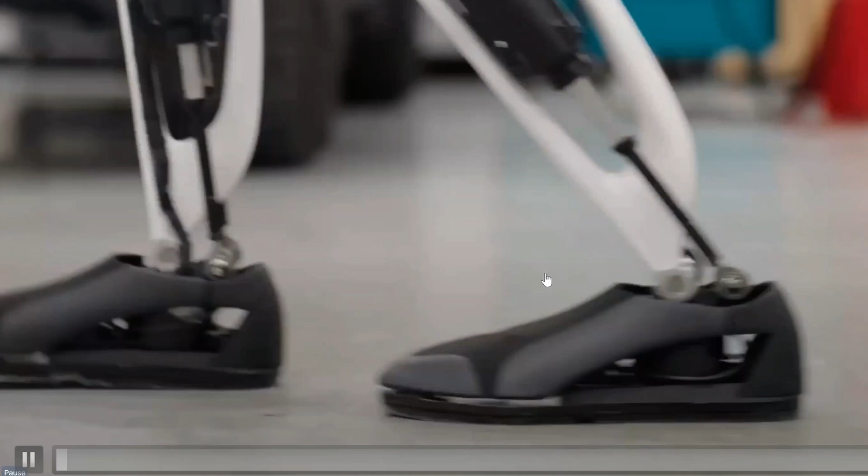Everyone kind of caught this image where they could see the toe box pointing up like that. And that caused a stir out there on the internet, everyone speculating whether A, this was new, and B, it must be actuated, because the only way that thing could be going up is it had to be actuated.

Okay, I'm here to tell you it's not. It's not actuated. I put a post out there just saying there's been a big flap over a flap. It's articulated, okay, not actuated. Full stop. Why? It just comes down to physics. It's simple as that.

We'll go through it, we'll explain why that is, and for many, many reasons. And at the very end, I think we will actually have the final nail in the coffin.

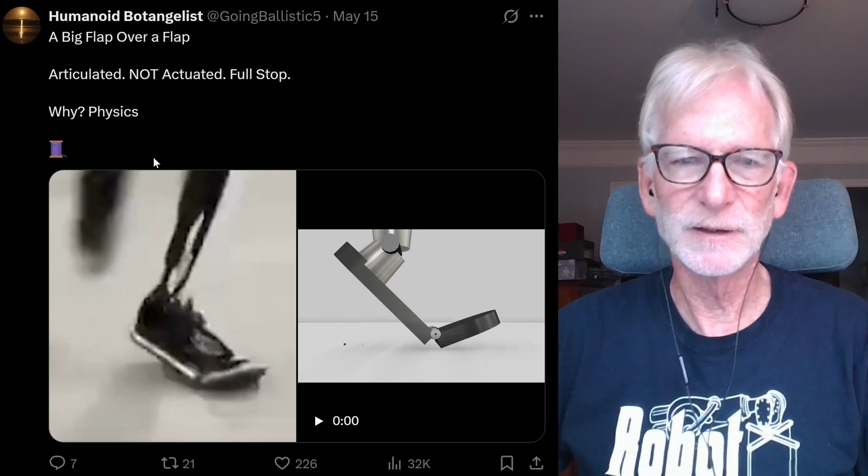This is part of a post I put out that for some reason is going crazy right now. It's got like over 30,000 views, just reminding everyone that in December 2023, when the Gen 2 bot was revealed, this is one of the images right from there where they say articulated toe sections. They didn't say actuated, they said articulated.

Articulated means it's able to move. It's got a hinge in there of some sort, and it has something to put it back in place, probably a torsion spring or something like that, some sort of flexible unit that'll do it. And you can see right here the angle that the toe box makes back there, which is why they put that in there at that point.

We were already seeing that Optimus could walk that way. There was a lot of skepticism on whether they should use RL for walking. And then others were doing it in Unitree, and those were demonstrating, hey, this works. And then everyone said, okay, maybe we should start to pivot in that direction. So it looks like because the modeling was so challenging, it took a while before they got to the RL.

I want to understand the part of the actuator modeling they made in-house. What was the challenge? Did you have maybe, like, you mentioned a couple of things.

Oh yeah, well okay, the first thing, like, these Heim joints are sloppy. Just modeling that right, that when you apply the force down here and going through there, what's the articulation going to be like? Saying exactly what that's supposed to be. So you have to model everything here correctly in the geometry. So it's partly a trigonometric issue. And then when you go up to the knee, it's even more complicated.

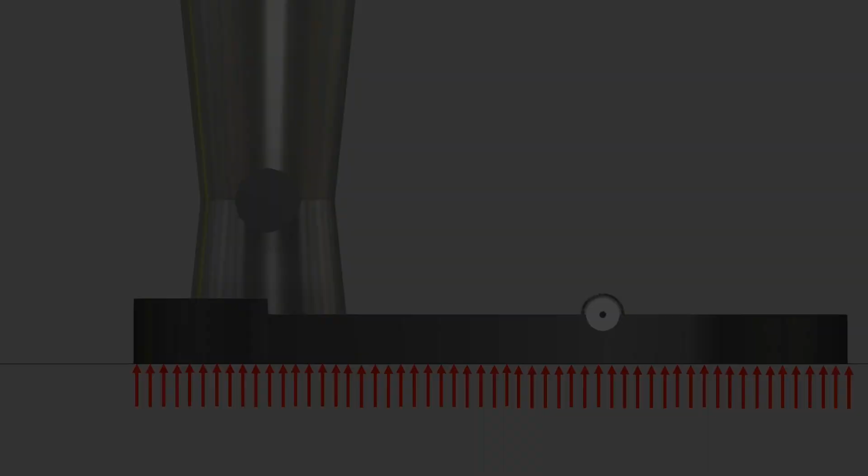What are the reasons that you want to have an articulated joint? So Gen 1 of not only Optimus, but many of the other bots out there, they just had a flat foot, no articulation at all, just because they were getting it out. Everyone was pointing out, oh, why don't you have something that's flexible and this and that, or putting on different shoes. And as you can see, I have a flat foot on a flat surface, and the force is evenly distributed over the entire surface area of the foot.

Now, as soon as I start to change the angle, like lift up my heel just a little bit, so I have a non-zero angle, the smallest angle, no matter what it is, will instantaneously result in this. At that instant, you go from full contact to contact along an edge or a point, but edge and a point is the same thing. One's zero dimension, the other one's one dimension. They have no area. So that means all your forces being right there, you're going to slip.

You're just going to slide right away. So you don't want to have a point of contact. You want to have a surface of contact going on there. And so the reason for having the articulation is now when you do that, look, you've got all this, which means you're not going to slip.

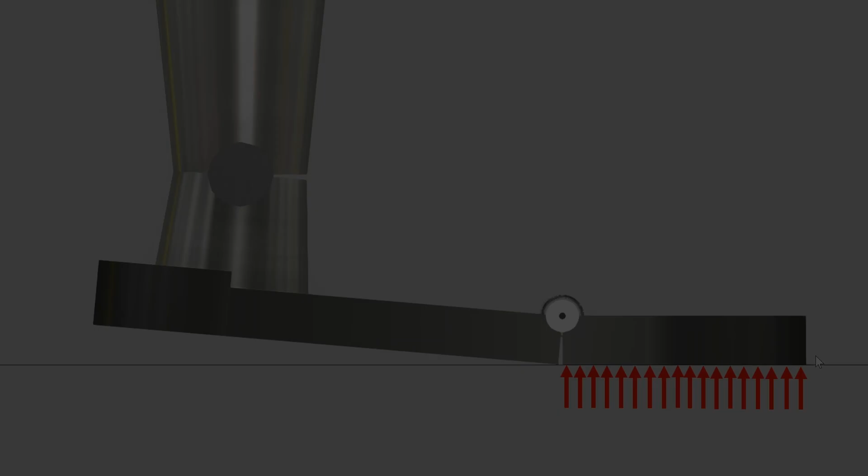From this, I'll go to here to this diagram. Engineers love these diagrams. So here's my foot opened up, and my foot is moving in the backwards direction along this vector V. And because it's sliding backwards, it's now going to create a force F right at that point, or actually right along that edge that we can see there. And as you can see, the hinge joint is not right down at the surface.

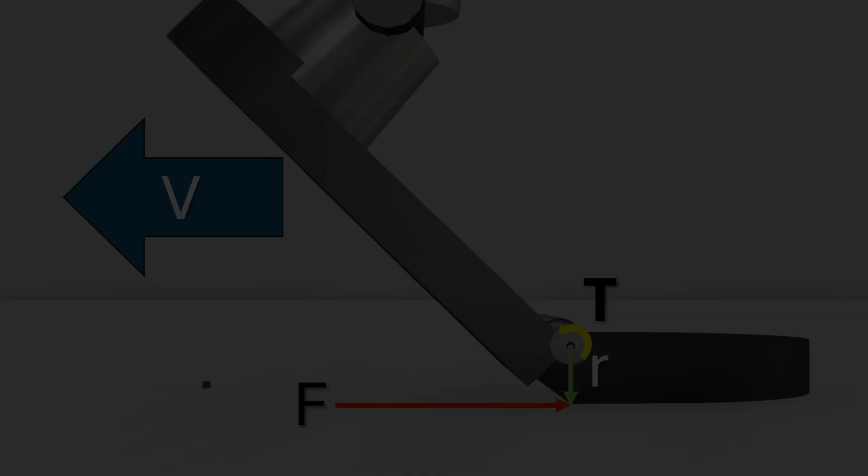It's up a little bit. So there's this lever arm R from here to there. And it turns out to be a lot higher than I actually thought. I thought it was like a centimeter, but now looking at it, it's like, man, it might be like 2 centimeters or more right there. So now it's very clear why it wasn't clear that they were doing it.

So I suspect that they didn't get the RL working until about a month ago.

Okay, so hello, Mara. How are you doing? Good, good. Yeah, if anyone just saw a previous episode, which was basically our own review of a previous walkabout or field trip at the Automate show, you're going to notice I'm still in the same studio, still wearing the same Robot Mafia t-shirt.

So it's clearly still the same day, but this is a second episode we decided to tape, which is going to be about the Tesla bot and the dancing videos that came out the past couple of weeks. Obviously there's been a lot of interest and people asking what's our take.

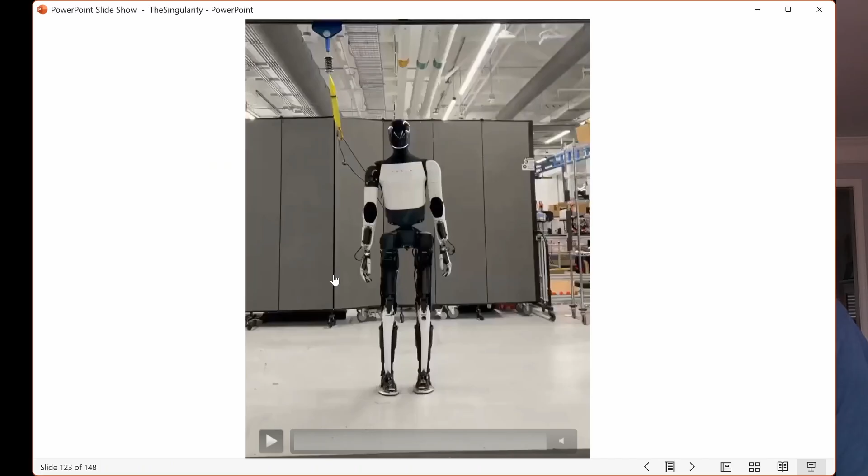So then this came out, just the week past or so, and this is the dancing robot, which everyone has noticed dances better than the human did in the Optimus suit going back three to four years ago. I think it's almost four years ago now.

And so this was a very short video clip. A lot of people get very excited about it, and we'll talk about the excitement in a few minutes here. But there were some reviews. So what were the reviews?

Well, let's go to the team itself to see what they thought. Milan says more coming shortly. The team has been working very hard in the background, entirely trained in simulation with RL. Now, again, he's pointing out RL. He didn't say that back in December.

Many optimizations and fixes have been put in place in our sim-to-real training code. The cable is there in case of a fall, not actually holding the bot, since this is an early result, which we will get more stable very quickly. Okay, so let's keep that in mind.

Then Julian Ibarz says, sim-to-real for Optimus is getting really good. It's quite handy to have more than a decade of actuator design in-house. So here he is, quote-posting his own colleague Ashish: sim-to-real, RL, zero shot. Everything is running on board and in real time.

Now, who is Julian Ibarz? Well, he is the Tesla bot AI lead, so he should know a thing or two about this. The other thing he says here is it's quite handy to have more than a decade of actuator design in-house. We've talked about this, that to do RL, you need to have a really good model of your bot, right down to the actuators, and the challenges of using linear actuators and modeling that correctly.

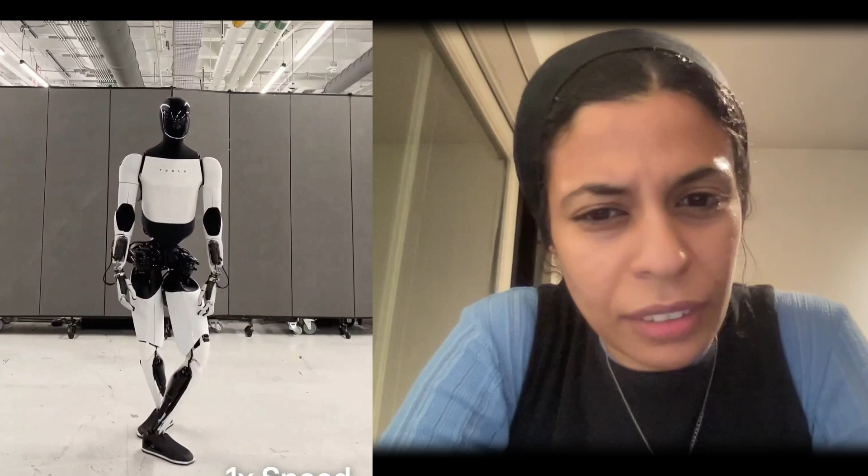That's what it came down to, and this is what Julian Ibarz's post about the actuator design tells me - they finally got it right, that they can do zero shot, they're confident in their model. It probably took them a little longer to get there, because if they were already doing RL back in the fall, I would have thought they'd have been able to do a lot more. I don't think they were holding back showing us anything - I think they didn't have anything to show, or it was taking longer because it's more challenging. That was a dead giveaway. I think there might be another post coming about some of the others.

Okay, here's a little more, no cables this time. Again, it's all real time, zero CGI, fully learned in simulation, and zero shot transferred to real. So they're pointing out that it's the zero shot going on in simulation, and I think RL also.

Besides the fact that it's fun, we had made significant improvements to our robot model in sim. Absolutely, of course you did. So in order to prove they could do this right, it's like a validation, and sometimes these silly things are the kinds of validations you need to do the normal things. You've got to stress it - this is an extreme situation.

So domain randomization, that's what they talk about - because we have no idea what the actual actuator on the motor is, we know there's going to be a range of behaviors, tolerances from manufacturing, temperature variations throughout the day. It's going to be heating up and everything else. So it has to deal with the fact that the servos are going to misbehave from the ideal, but they'll be within some sort of distribution. So you need to have enough.

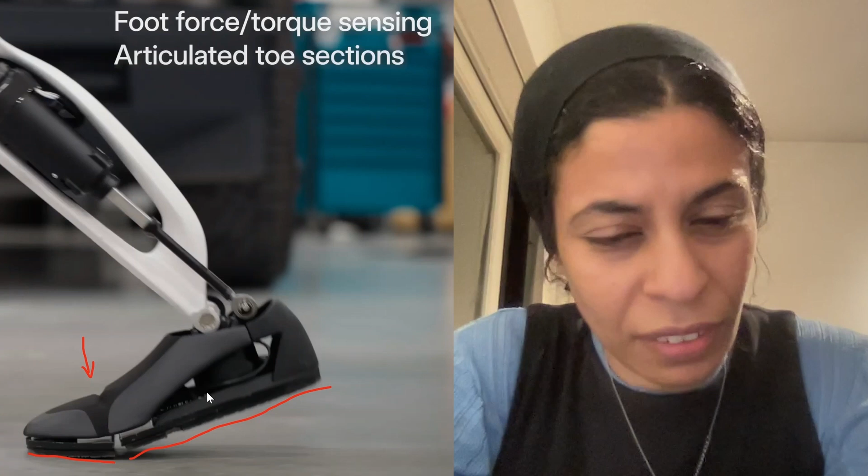How is it adaptive for what exactly it senses here? What will it adapt in the foot? Well, I think part of it is to get an idea of whether you're tipping or not.

So when we stand up, we're feeling a lot through our feet. We can kind of sense what our balance point is. And of course, we can talk about the importance of an actuated toe to balance, which I think is really important. You know, if you're standing and leaning forward, you notice that sometimes you are pushing down on your toes.

To get the restitution back to where you want to be, that could be done with a strong spring. So you make sure when it's flat out, the spring already has a lot of force, that you require a lot to just begin to get that opening, which means right now it is trying to push back a little bit to help the overall structure. So you can do that passively or you can do it actively. We have to kind of do it actively because we don't have springs built into the balls of our feet. So we actually have to pull the tension, but you could crank it up already with these things, and that it already is supplying the torque that you would want to be able to keep the balance.

And you might want to also be able to see where your pressure point is. You want to know where's the pressure point of the force. Is it back here in the heels? Am I rocking on my heels or am I on the ball of my toes? So that's very important to be able to measure, to be able to maintain balance, no doubt about it.

So they all have something down there. They all have these sensors. It's not just Tesla, all the others that I've spoken to. So it's well known in the industry to do that.

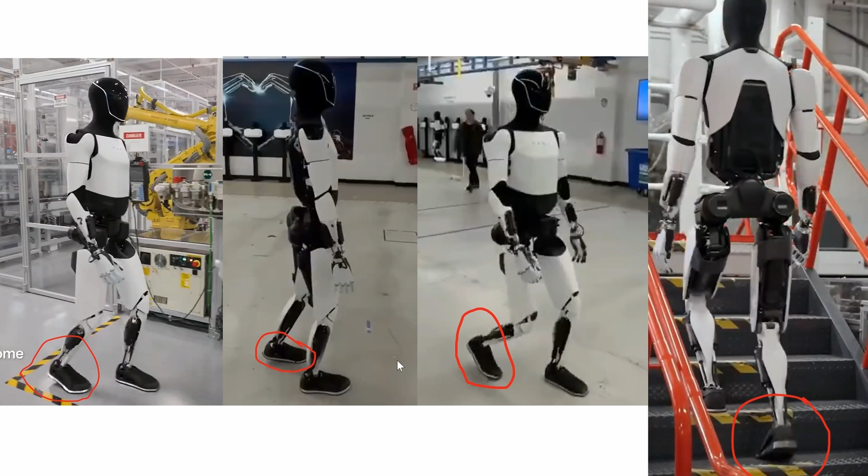So if you were looking around, going back to that, and then looking at the video I just showed, which I think was from last fall, you can see that toe-off happening right here. So that means you're seeing the articulation. You can see also a little bit of articulation there. A lot, right? And this is the one from April 2nd.

This is another one that Humanoid Hub had noticed, walking up the stairs. We already were seeing it was there. So the signs were all there, just that no one noticed. And again, they went kind of crazy thinking that the articulation was new.

I was like, no, they're not changing a whole lot to the Gen 2. This is the Gen 2 platform. Don't change the Gen 2 plate. Change it on the Gen 3 if you want. So right now it doesn't have that.

So here is a video, again, from that same announcement, the close-up where you can see it in action. So you can see exactly how that gap opens up and closes. As soon as the toe comes off, it snaps back into position and then it moves up. So there we can sort of see it going back and forth again and again to get an idea of exactly how that toe box is working.

They're coming with heel-toe and it's pushing off. Again, that's December 2023. The walking gait looked pretty good back then. And then, right at the announcement, they kind of nailed it at that point. And it's surprising it didn't improve for such a long time. It's been over two years before we've really seen it get up to this stage.

And I think either they didn't think you needed RL because there was a lot of skepticism on whether they should use RL for walking. And then others were doing it, like Unitree, and those were demonstrating, hey, this works. And then everyone said, okay, maybe we should start to pivot in that direction. So it looks like because the modeling was so challenging, it took a while before they got to the RL.

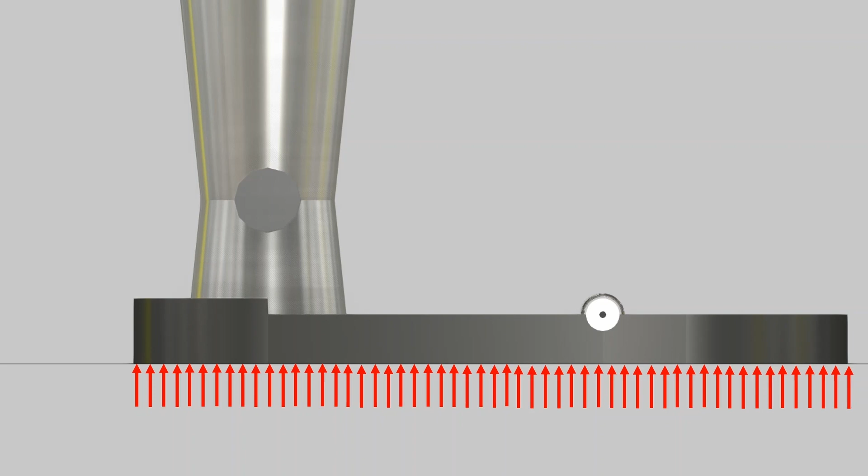Now, as soon as I start to change the angle, like lift up my heel just a little bit, so I have a non-zero angle, the smallest angle, no matter what it is, will instantaneously result in this. At that instant, you go from full contact to contact along an edge or a point - but edge and a point are the same thing, one's zero dimension, the other one's one dimension. They have no area, so that means all your forces being right there, you're going to slip.

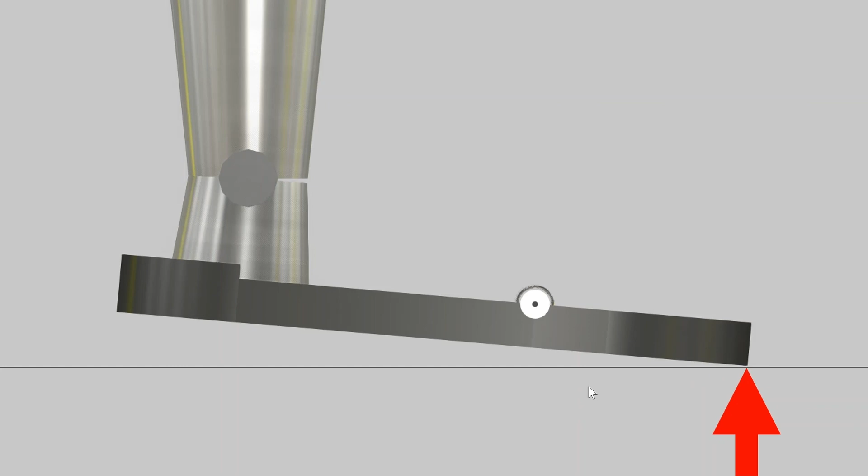You're just going to slide right away, so you don't want to have a point of contact. You want to have a surface of contact going on there. And so the reason for having the articulation is, now when you do that, look - you've got all this, which means you're not going to slip. Now, you still can slip a little bit.

I think we all know that sometimes when we're walking, especially on an icy surface, it's that back foot that suddenly slides out underneath us when we least expect it. For that reason, because the surface area has gone down, but it's still finite - it's not zero.

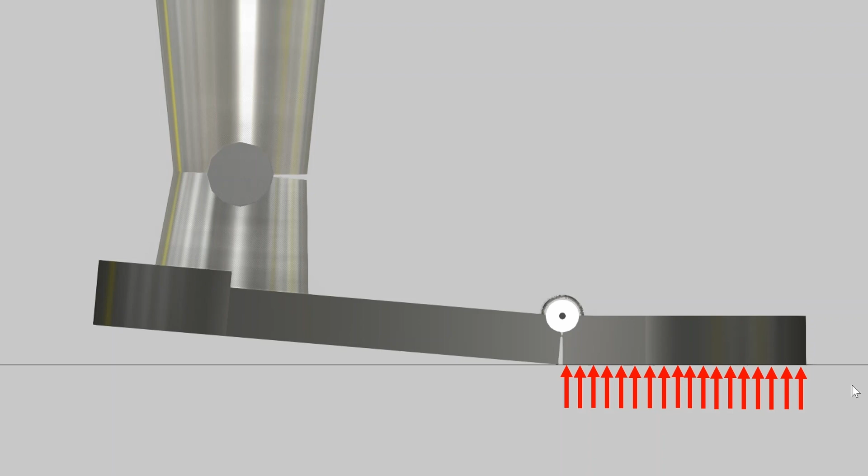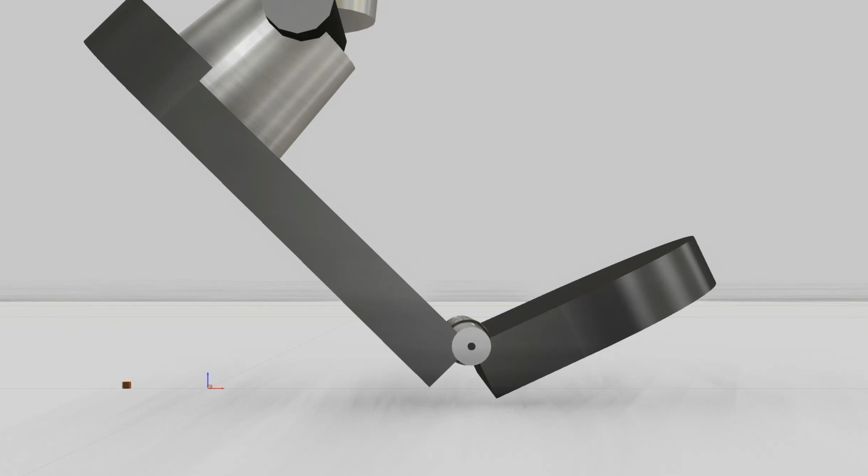Now let's go ahead and look at the example of what happens when you start walking backwards with this thing. Remember, we get a pretty big gap in the Tesla bot when that opens up. If you look at this animation, what you can see is that if I drag the foot backwards - I lift the foot up, so we can see it opens up, and then as I drag it backwards, I end up snagging this corner here, which is going to open it up.

And if it's not obvious from this, I'll go to this diagram - engineers love these diagrams. So here's my foot opened up, and my foot is moving in the backwards direction along this vector V. Because it's sliding backwards, it's now going to create a force F right at that point, or actually right along that edge that we can see there. And as you can see, the hinge joint is not right down at the surface, it's up a little bit.

So there's this lever arm R from here to there, and it turns out to be a lot higher than I actually thought. I thought it was like a centimeter, but now looking at it, it might be like 2 centimeters or more right there. And we know F times R produces a torque T, in this case in the counterclockwise direction, which is going to cause this thing to rotate, probably in excess of whatever the spring constant is that they have there.

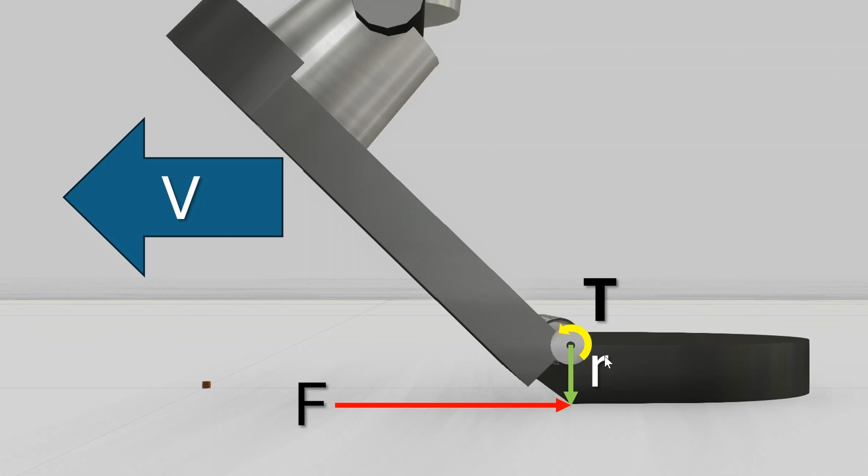So the torque is going to exceed whatever the closing torsion is that's coming from that spring, and that just results in it opening up like that. So that's going to happen, and so long as you're dragging that foot back, it's going up. So it's not actuated, it's articulated - the physics proves why that flap happened.

Quick question about the joint, I know it's physics, but the positioning of the joint and the size of the joint - you mentioned torque, so how do you make sure?

Yeah, part of it is biomimicry I'm sure, it's similar proportion to a human foot. And there had to be a good selection of what that spring force would be, so they're going to have to figure out when they're walking exactly how much they would like it to bounce back. That's going to come from their modeling to figure out what it is.

So you're going to have a closing torque that will kind of keep it in place fairly well, fairly stiff. And as they go up, the more displacement you have, the harder and harder it's pushing. And then if you go too far, it's going to push back - that's what they want. And then that's going to store energy.

And then when you go out of that and into the swing phase, this is when you do something they call plantarflexion - as you start to walk, your ankle is pushing down, and that's helping the leg lift up, lifting up the whole body. And then at some point you need to transition as it comes off, and then it's going to close.

And that's where you're going to have that problem - say you got a flat surface here and another flat surface here, which means you're going to have that same old problem, you're going to kind of tip up to a sharp edge. That's why the front part is usually not flat - they have a little rolled surface to roll off, and they're a little bit squishy so that you're pushing down and get it.

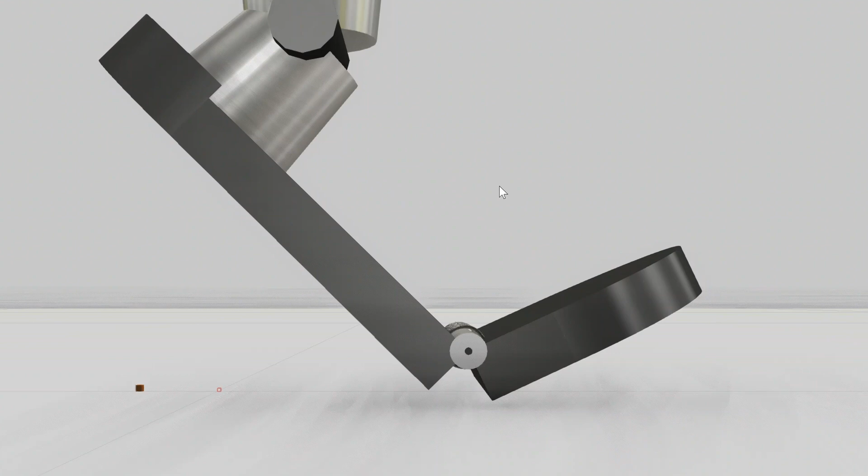And this here, when I grabbed this morning, the view count on this was 66K. It's now, I think, over 110,000, so it's nearly doubled since then.

And I think it's doubled because of Anand. This is the post I put out there just saying the articulated toe sections have always been in the Gen 2 Optimus design since the December 2023 reveal, just not obvious until the gait improved. And I showed again the images demonstrating that.

And Anand basically says an articulated toe, even a well-tuned passive one, adds a lot to improve the gracefulness of the gait. It also becomes important while balancing weight transfer and kinematic reach for going upstairs. It's actually obvious when you just walk and pay attention to what our feet do, but we don't think about it most of the time.

The human body is amazing. I love that because this is what I've been telling all our viewers, that you can be a biomechanist. Go out and study what you do. Start thinking about what each joint does and what happens if you freeze a joint. Can you get through the day without that joint or not? Or it's like, yeah, you can get through, but it's very, very difficult. So again, he's pointing that out, that we do that. We don't realize that we're doing that.

So who is this Anand guy? Well, he's someone who's been with Tesla for over 10 years and has worked on projects going back to like the Model X and S, and batteries. He's also been on the Optimus project. I think last week was his last day there. He's now moving over to Zipline.

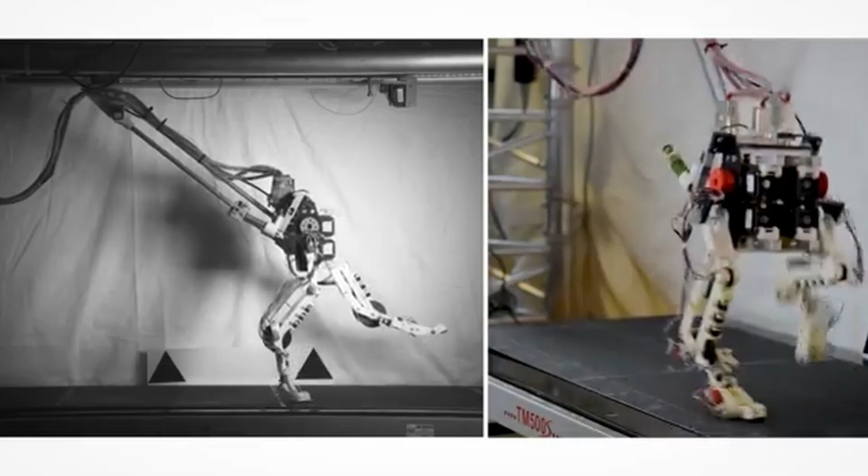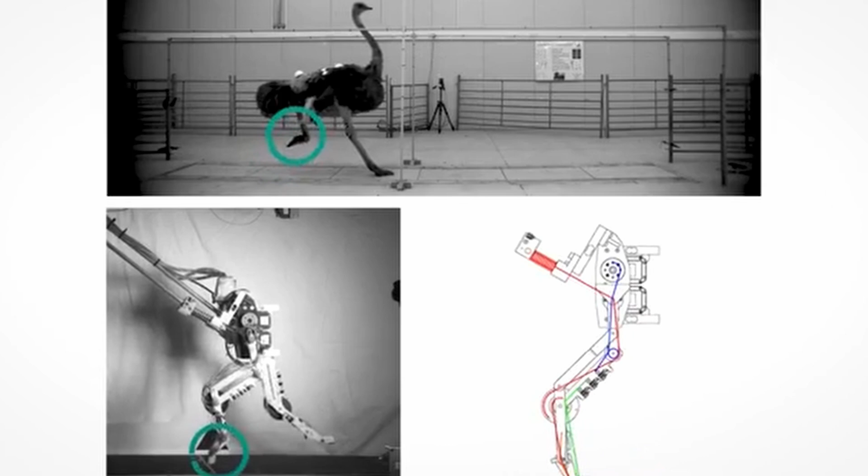Sorry to bring this one, but I think there was a bot at Max Planck Institute in Germany - I think this was 4 years ago - and they did the bird bot. I don't know if you heard about this bot. In the foot they have this kind of compliant or articulated joint when it runs, inspired, I think, by one of the birds. They had someone from biology, and I think they take exactly inspiration - this joint when it runs or goes over obstacles, just for free - this kind of articulation.

Yeah, I seem to remember something like that, and there's a lot of clever designs where nature has figured out a way - nature is in a perpetual energy crisis, that's what it comes down to. Everything through evolution has been able to figure out how to solve an energy crisis, and you need to make sure you don't expend more energy than necessary to do whatever you have to. That's why nature figures out some trick to take advantage of physics, to store energy or return energy or get some mechanical advantage to do amazing things. So biomimicry is very, very important because there is a solution out there just waiting to be applied in many places.

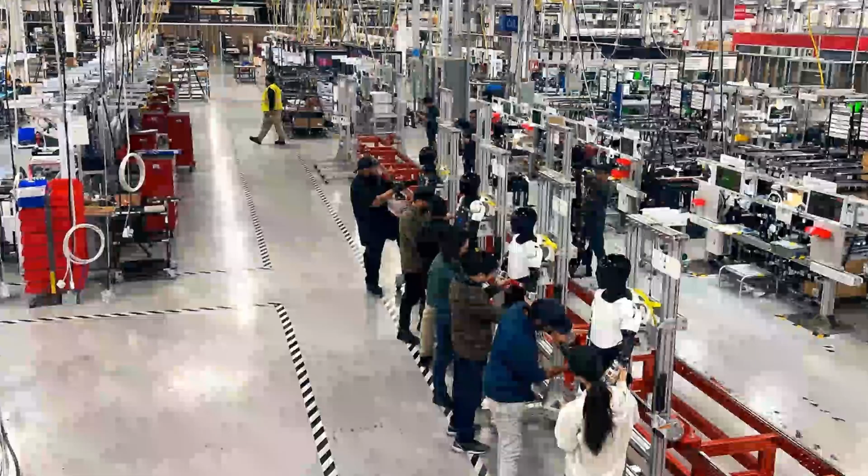This image here we're seeing came from the quarterly report showing the assembly line for what is going to be this pre-production version of the Tesla bot. We can see they're already fitting the new hand, the 22 DOF hand. And we can already see some changes around the neck area and in the torso.

The chest plate's a little bit different. The shoulder is covered a little bit different. So kinematically, it's all the same. It's just that they've tightened up a few things. Maybe the actuators are lighter and tighter, like they say.

We don't have a really good image of what's going on down below. Of course, the legs are all made out of black color, so it's really hard to see. We can see a little bit in some places. From what I can see when I zoom in, it doesn't look any different than the Gen 2, probably with little tweaks here and there. I'm pretty sure the waist area is the same, so that's why we're not seeing the Gen 3 bot.

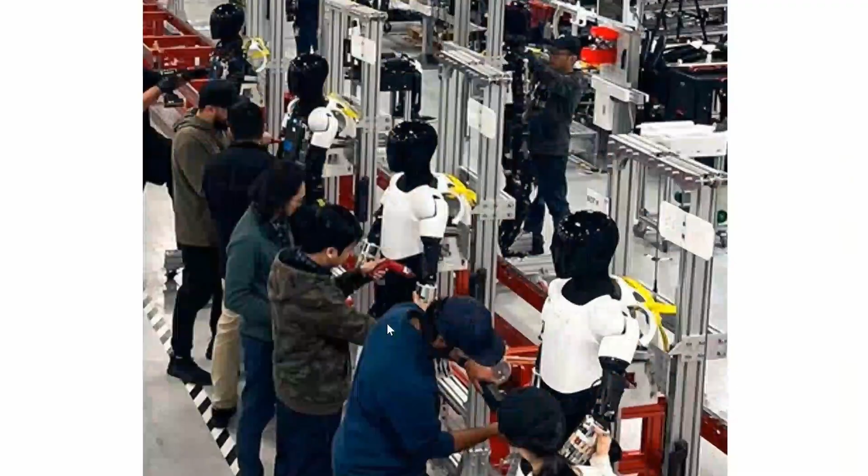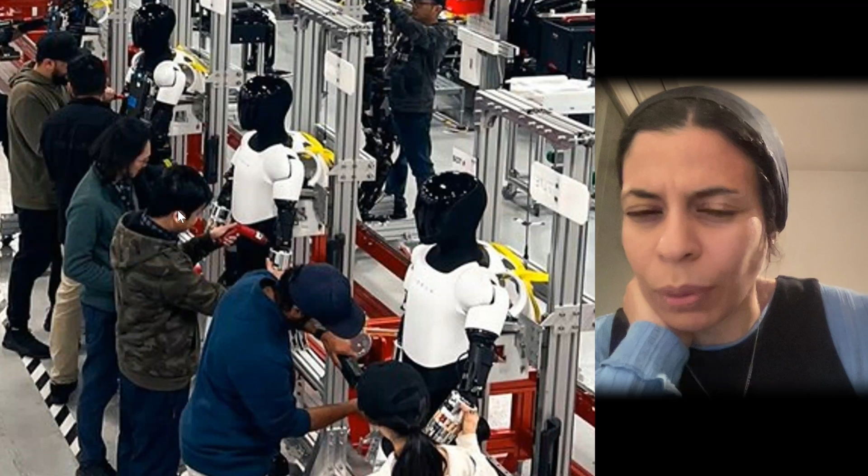Just to remind you, I don't know what they're selling for, but I think Elon said like $30,000 or something like that. And who's buying them for that? Someone was saying 30,000.

He might be saying that they should be able to make them, or people have asked what it would be, and it's more or less, it shouldn't be more than a car. If you figure a car is somewhere around $30,000 manufacturing cost, it's hard to say what it's going to be until they really scale it.

So the initial ones, I'm sure they're under 100,000. They're probably under 50. They might be close to being able to build these for 25 to 30, and it could probably go down from there. I'm pretty sure they could bring it under 10,000 eventually when they get those numbers.

The question is, are they going to sell them for that? And they won't at first. If they do, there should be a shareholder revolt and lawsuit because that's financial malpractice, because the value of the bot is so much and the demand is going to be way beyond supply at first.

So they can easily be leasing these for 100,000 a year, and I'm pretty sure that's what they're going to do. And not just them, they're all doing the same thing. Agility, effectively at their hourly rate, it's also probably coming close to $100,000 if Digit is working 24/7, or 22/7, whatever it would be.

Companies are willing to pay that right now because they can't find the workers, and it's actually a little bit cheaper than the labor force that they would have.

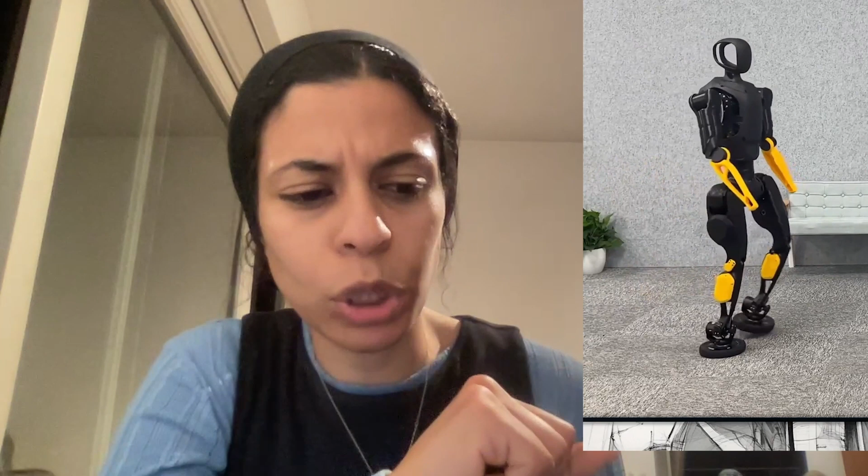So, like the video that you shared, I'm not sure which company, the wheel that flipped and became horizontal and vertical. I can't remember the name of the company. It's another company in China, because there's so many of them, and pretty much it came out stomping, and its feet were literally wheels that were on the floor, and then it would jump up, and the wheel would all of a sudden pop into position, and then suddenly it was able to go around like that.

It's impressive, the switch from horizontal to vertical, but the way it moved, when you explain the articulated joint, it makes sense, but it's not... it's one of those that as a proof of concept is interesting. It's not what the final version is gonna have to look like, because I'm sure just taking a wheel and turning it over and stomping around like that is not ideal. So you'd want to somehow change the side profiles of those to behave a little bit more like a foot, maybe getting the ankle involved. So yeah, I think they probably rushed it.

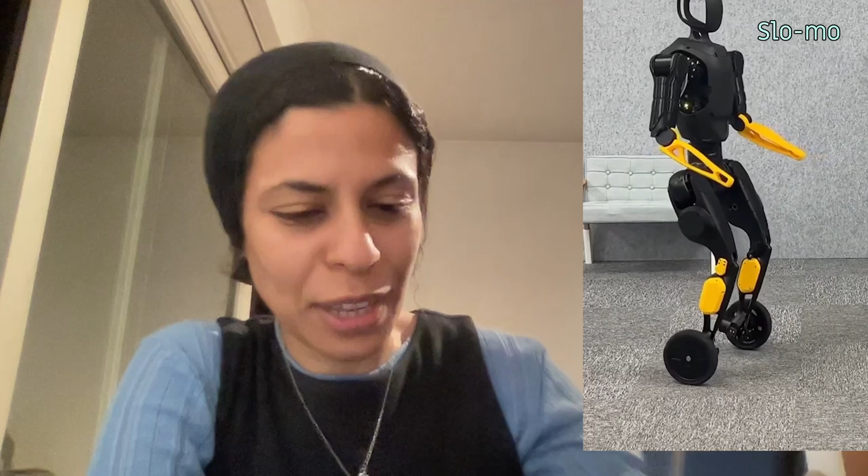It's like, just get some wheels from somewhere, and we'll go ahead and put it on there. So I would definitely design it differently. Why did this engineer, whoever designed that, decide let's do something different? Is it easier for the control? Is it whatever? What is the rationale?

I think it's just because of that argument of wheels versus bipedal. And certainly if you look at the robot dog that Unitree has with the wheels on it, it's just incredible. You just lock the wheels in place. So I'm not sure if popping around sideways is the solution, because with the wheels already in place, they almost can be a pretty good foot. You just lock them and they walk around okay.

They're not quite as flat, but in some ways they almost sound better because they're tires, whereas all the other robots are coming down with this hard steel, clang, clang, clang.

So if it's deformable, if someone can figure out how to take that wheel and deform it, so now it's not round but takes more of a profile down the bottom, and then when you're ready to go wheel it just suddenly goes boom and gets into that shape. That's where soft robotics comes in, Marwa, designing a foot that just goes out and pops back into the right shape. I think that's the solution, not this other thing of popping around.

I agree. What they're doing is showing the idea of having something that's a foot and then having something that can flip over to be a wheel. I suppose they could make a nice side profile that makes it very much like a foot, even though it's a bit wider than I'd like to see. But maybe you play with that design a little bit, and then it pops up and now it's clearly a wheel, just by changing direction as opposed to changing shape.